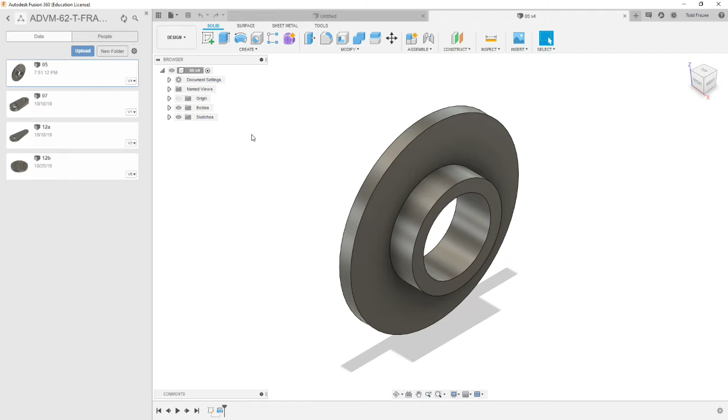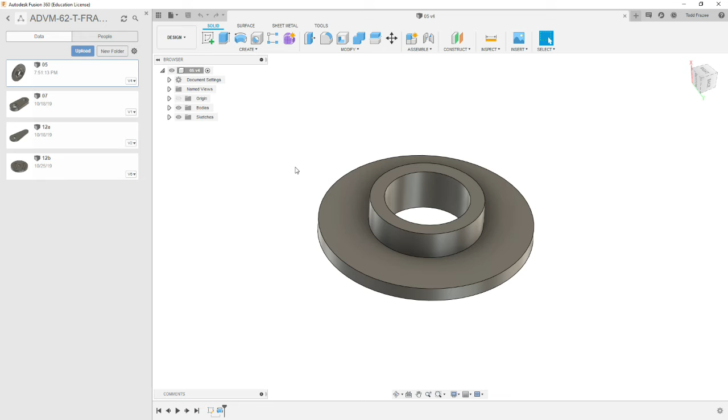Now the command I'm going to teach you how to use here to machine this part, the machining strategy, is called 2D adaptive clearing. So it'll take the entire model and process what material needs to be removed. Now in this case we're going to start off with a rectangular or square larger piece, and we don't want to waste a lot of time machining away that entire square, but we want to contain it to a circular shape that's an offset of the diameter of the part, and that way it'll rough away all the material within that circle. So to give a reference for that circle, we're going to create a sketch.

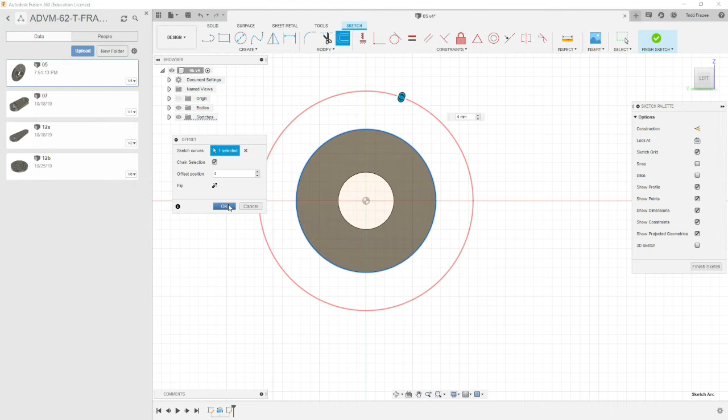Go to Sketch, select on the bottom surface of the part, and then we're going to use the Sketch Offset command, which is this one here. And we're going to select on the outside edge of the part, and we're going to offset that 4 millimeters. We're going to use a 1/8 inch end mill, which is slightly over 3 millimeters. So that should give enough room for that cutter to cut within this space. Okay, and you're going to select OK. And we'll finish sketch. You can either press finish sketch here or here.

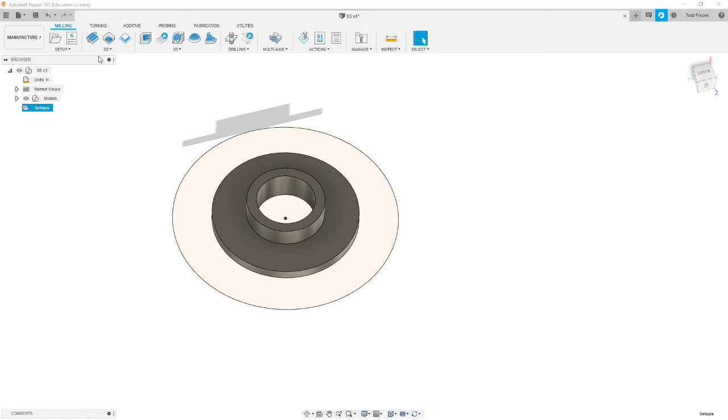Now we're ready to go into the programming side, which is in the manufacture workspace. Let's close the data panel so we have a little more menu bar space, and we're going to switch from design to manufacture. And we want to make sure that we're in inches because we're programming machines that run in inch with inch tools. Our model was drawn in metric, but it will convert them. Alright, so first, like we have done before, you're going to do your setup for the material. So we're going to press Setup, New Setup, and it's going to put a rectangular volume around the part.

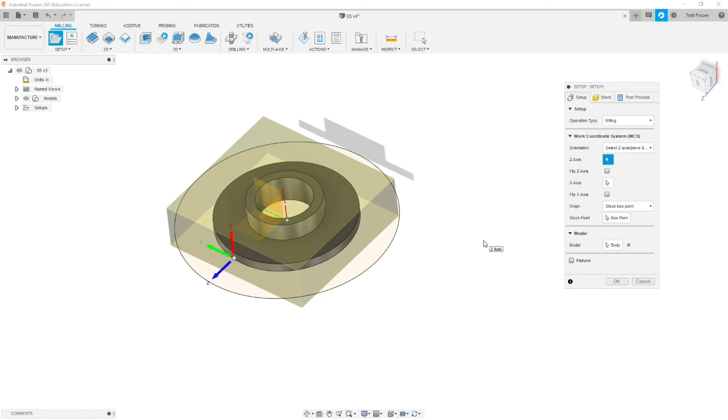And we want to change the orientation of the axis of the machine. So this was modeled so Z was going off in this direction. We don't want it on model orientation, so we're going to do Select Z-axis plane. And so we are going to select the top of the part as our Z-axis plane. Now, because this is a completely round part, it really doesn't matter which way X and Y is pointing, provided we set it up in the machine the same way that we've set up.

Now, our origin, I'm going to put it on the top left corner. It could be fine being in the center, but you select stock box point and then pick the white point on the left corner. So this puts our x-axis, from the operator, right to left, y would be away from or towards the operator, and z is pointing towards the spindle. Now let's adjust our stock size. We're going to the stock tab.

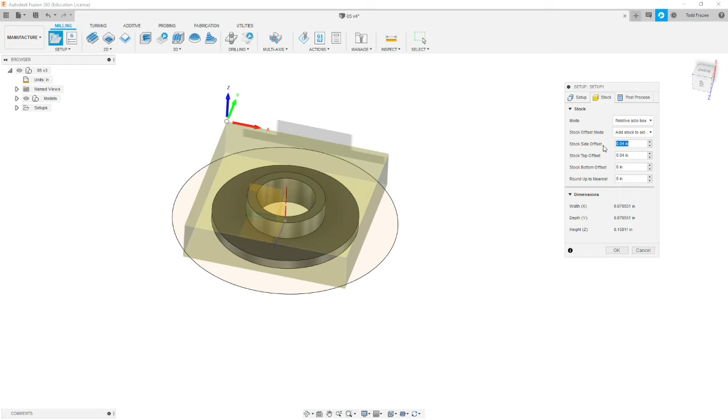Now our stock offset on the sides, we're going to bump this up to a 1/2 inch, and then we're going to go down, and our top offset is going to be 0. So we're going to start off with a piece of brass or bronze that's 3 millimeters thick. We should be able to buy that in metric, and that'll save us time not having to machine the material down to thickness. So we go back to our setup tab. Our origin should still be the top left corner, but it moved out to the edge of the material. And our stock size is approximately 1.5 inches. It's a little bit more than that.

Now let's go to our post-process tab, and we're going to put in a numbering convention that follows the number of the part. So we're going to do a number. The first 2 digits will be the dash number of the part, which is 05, and then this will be program 1. So 01.

Then we're going to put in a program comment, which will be the name of the program. It'll show up on the setup sheet. Let's call it Operation 1, and we're going to use work coordinate system offset 1.

So to review on setup, we should have top left corner, Z pointing up, X pointing horizontally along this edge. And our stock should have a 1/2 inch on the sides and 0 in all these other boxes. And our post process should be number 0501, operation 1 with work coordinate system 1. And we're done with that step, and our setup will show up over here on the left.

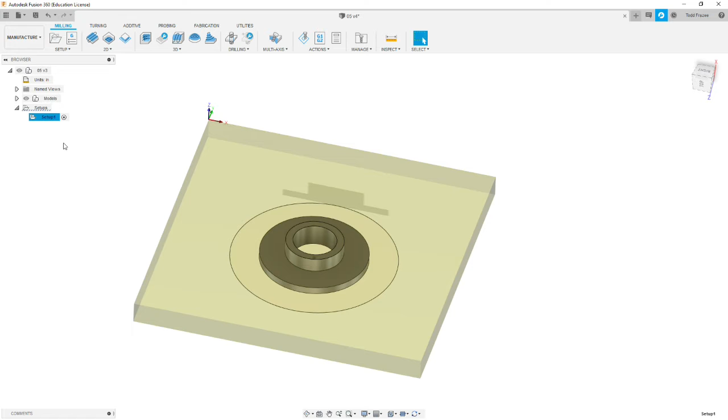Okay, so now we're going to apply the 2D adaptive tool. Now this is really effective for real complex geometries. This is a fairly simple part, but it has enough features that we can use this command on it. So select 2D adaptive clearing, and it's going to start with what tool to select. We're going to select the TCOSE library, and then we're going to select tool number 17, which is the 1/8 inch flat end mill. And select OK.

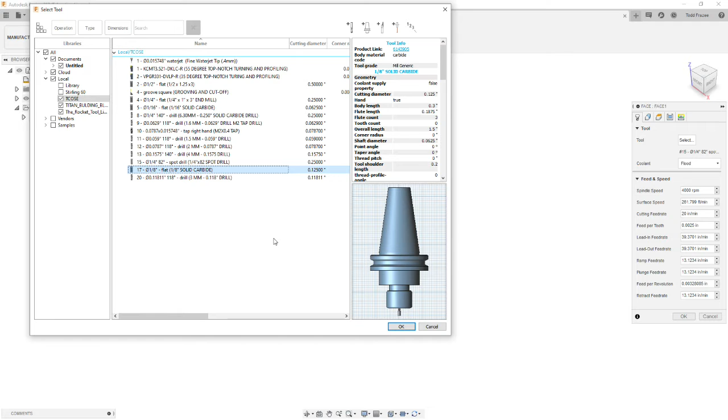And we're going to go 5,000 RPM. And our cutting feed rate, it should auto-populate already at the feeds and speeds that Kennametal recommended on the conservative side. Kennametal says you can run this much faster in feed rate, but we don't have a machine that has a high enough spindle RPM for it. So it's proportional to the feed rate. We could go up to 8,000 RPM on our machines, but for this academic class, we're going to go 5,000. Okay, so all of these should be at default. Your ramp rates and plunge rates, general rule, will be half of what your other feed rates are.

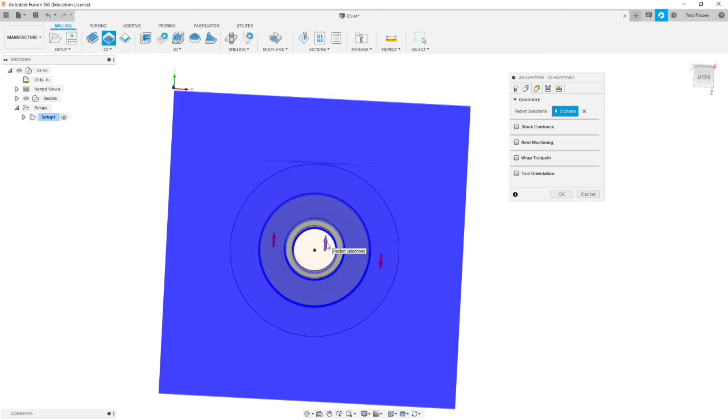Okay, we're going to go to geometry, and we're going to select the outside of the part itself. We're going to offset. We're going to select this boss flange. And then we're going to select this inside edge here. And we need to check that the arrows are on the correct side of the line. Now, this last one is not, so we're going to pick on there. You want the arrow where the material is going to be removed. Okay. All right.

Now on this one, it's different than what you've done before. We're not going to use the stock for the stock contours. We're going to select the stock contour, and we're going to select this sketch that we've made. And that'll contain the machining to within that boundary. Our lead-ins will still want to lead in from outside the material. Okay, so now let's move on to the next tab.

Heights. We'll leave these all at default. And we're going to machine to the selected contours. That's how deep we're going to go, but we're going to leave some material at the bottom. We don't want to completely remove this from the part material, so we're going to leave 0.01 on the bottom contour. And that'll leave some flash at the bottom, or, well, in some cases we'll cut through, like in the hole. But we'll probably leave a very thin layer of flash here to keep this part connected to the surrounding material while it's being machined.

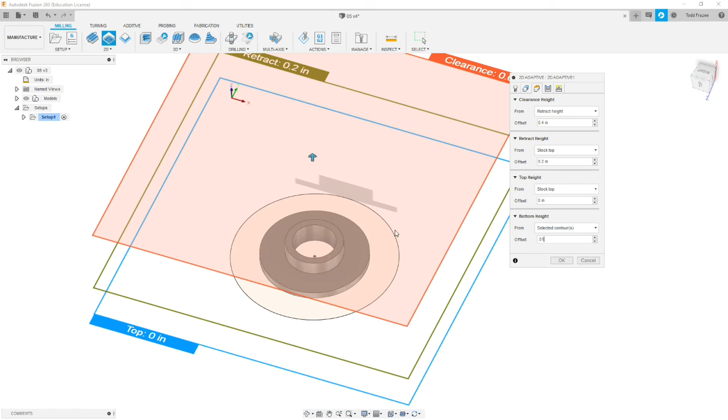Okay, we're going to go to passes. We're going to leave these all at default. We're going to let the optimal load auto calculate. We do want a climb cut. We are going to cut at multiple depths. Our maximum roughing step down is going to be 0.06. So it's roughly half the diameter of this cutter. We're going to go in order by depth.

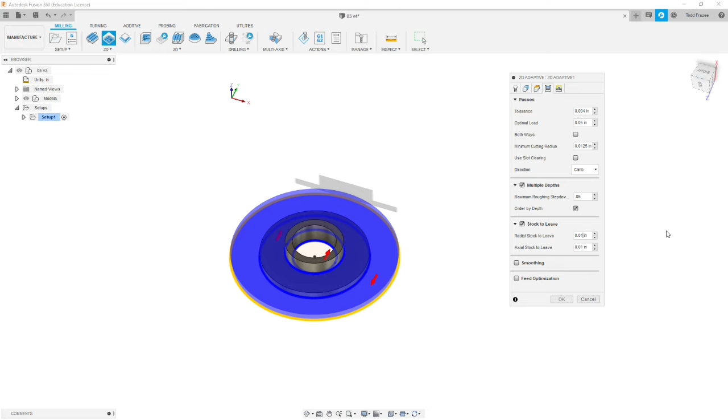And the stock to leave, we want to leave a little less than that. This is a little tiny part, so we're going to leave 10 thousandths radially and axial. So this is just purely roughing. We're going to come back and finish every surface on this part. Alright, because this is roughing, we can skip the smoothing and we're going to go to linking tab. We're going to leave all of these boxes at default.

And then our horizontal lead in and vertical lead in and out. So on horizontal lead in, we're gonna bump that up to 0.07, a little over half the diameter of the cutter. For this, we're not going to do any fancy ramping, so we're going to do a plunge straight down. And the cutter is center cutting, and this is a fairly soft material. Our ramped clearance height, we're going to set that at 0.01 is fine, and then we'll select OK.

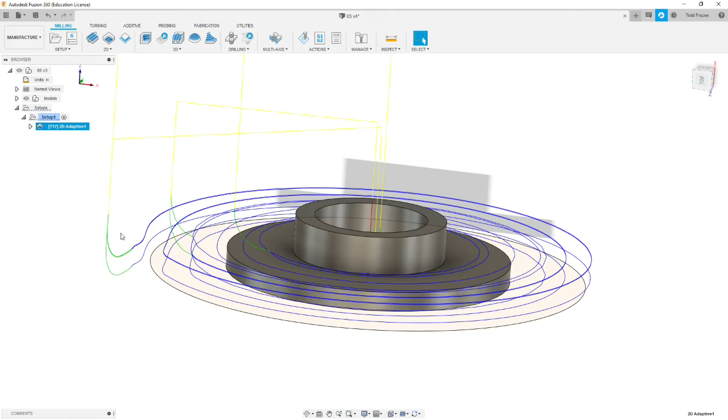So as you see, we have a vertical lead in and a horizontal lead in, and it arcs in, and it's removing all the material, starting with this circle as the edge, and then it's going to do it in a couple steps on the outside and several steps on the inside. And if we look at the side view, we should be not cutting all the way to the bottom. So we've roughed away most of the material.

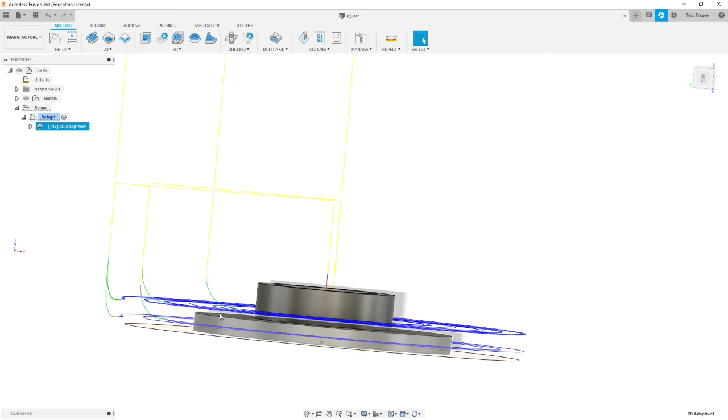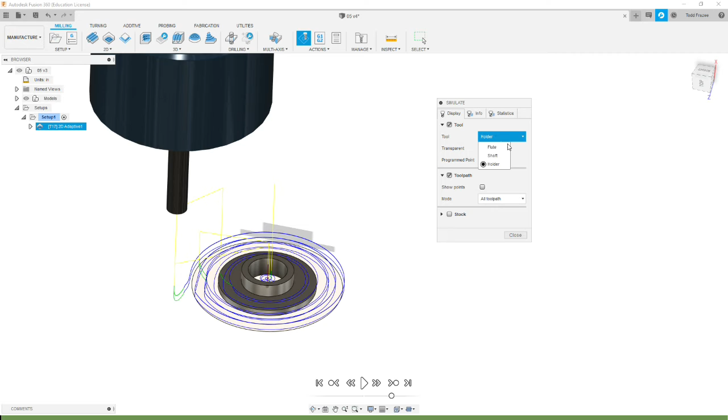Now let's simulate what we've done so far. So we highlight that operation, and then we're going to go to simulate. And for this one, I'm going to hide the holder, just because the holder is so big in relationship to the part, you won't be able to see anything. Okay, and we're going to display the stock.

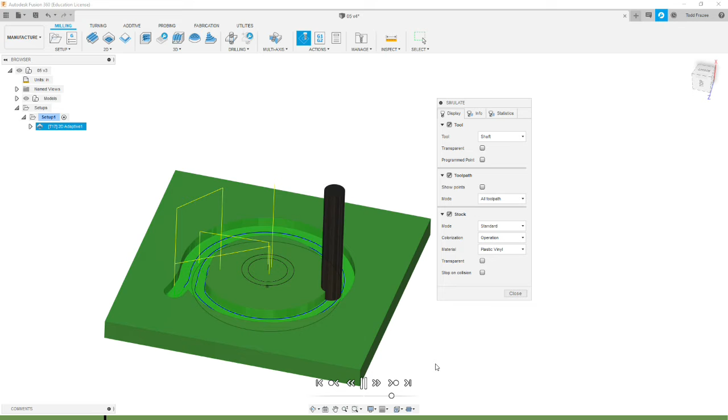So we have it coming in, arcing in. It's spiraling towards the center. It's now going to pick up, and it should plunge in the same area to do its second clearing. And now it mills out the center, and now it's going to go around the outside periphery.

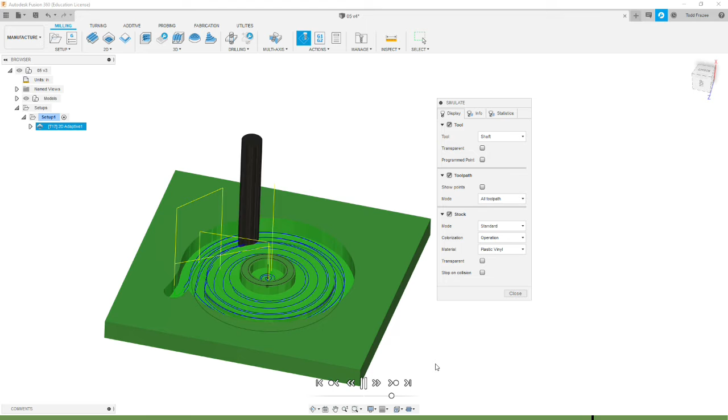Okay. The reason it went back to the center zone is we selected that box that says finish by depth. So it's finishing everything to a single depth, and then it comes back and does a center. Now you notice these facets. These facets are going to show up in the part, but it's roughing. And the machine will run a little faster, but it's broken the arcs into line segments.

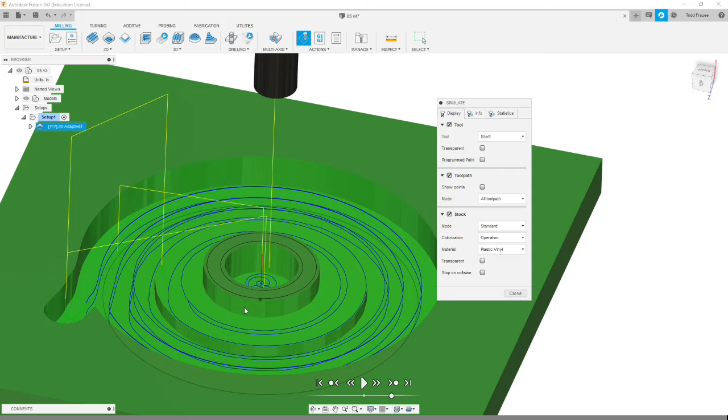Had we selected that smoothing option, this would have cut a more smooth circle. It's going to be critical that we have the smoothing option selected when we do our finish cutting. Okay, so we've cleared all the material out of the way. Let's hit OK. All right.

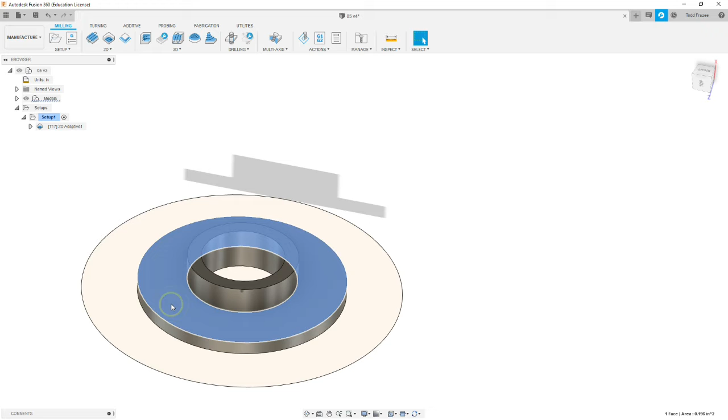So to do our finishing, we need to finish this surface. We need to finish the inside diameter, and we need to finish this outside diameter. They all have 10/1000ths of extra material on them. First, we'll clean up this face here. So we're going to go and use a 2D contour command.

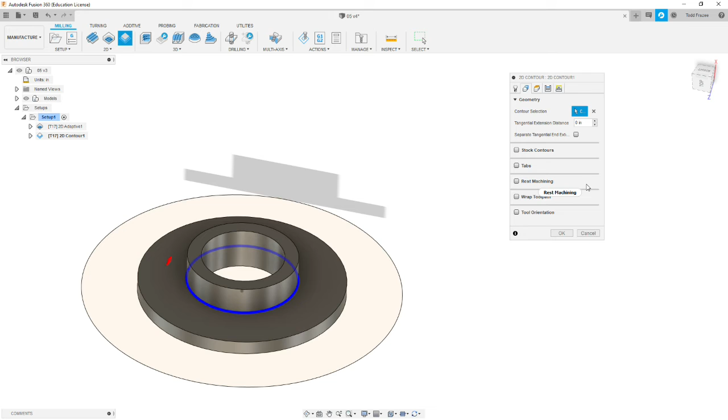We're going to continue to use that 1/8 inch end mill. And we're going to cut up to this boss feature here. So we're going to select the bottom of the boss. Make sure the arrow is on the correct side of the boss. And now we are going to leave everything on the first tab as is. Same RPMs and feeds and speeds. Our geometry, all we need is that circle.

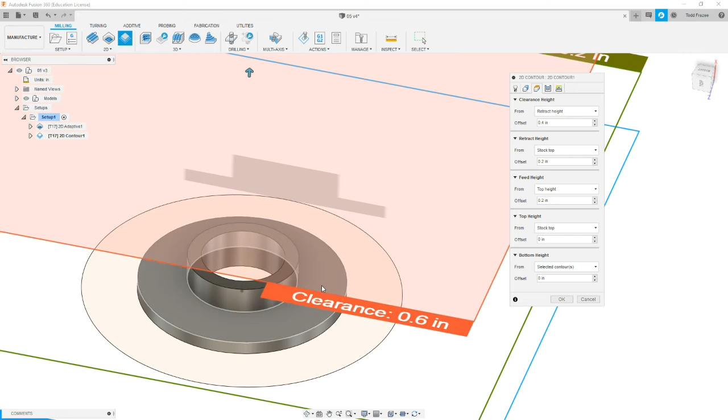We're going to move on to heights. We'll leave all of these at default because we're going to cut down to our selected contour. Okay. On the passes tab, we're gonna come down these. We have tolerance, we'll leave alone. Sideways compensation, yes, we want to climb mill to the left.

We do want to select this cutter compensation type wear. That allows the code to be output so the person operating can adjust the diameter of the tool based off the wear of the diameter of the tool. Okay, so we're going to keep continuing down. Our finish feed rate, we're going to go the same speed as our roughing rate. And finishing overlap, we're not going to worry about that. And lead end distance, we want it to do a full lead in, so we don't want to change that.

We're going to skip down to rough passes. These are horizontally. Now this flange is wider than an 1/8 inch. So we want to go around multiple times so that we're cleaning up the bottom of the part, the entire face. So we're going to do a maximum step over of 80% the diameter of the cutter. So let's get our calculator out.

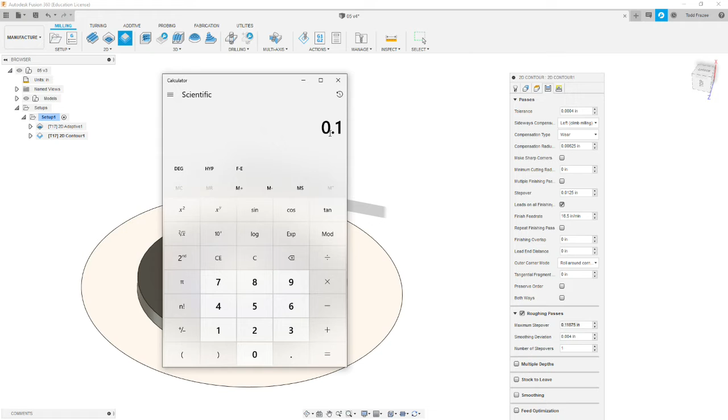And we're going to take 0.125, which is the diameter of the cutter, and multiply that by 0.8, 80%, which gives us a value of 0.1. Okay, so we're going to put 0.1. 0.1 is a good number. 80%, if you're doing pocketing, it'll assure that you have full cleanup every time it changes directions.

Our smoothing deviation, we're going to leave it 4/1000ths for the roughing cut, but the number of step overs we're going to do, we're going to do 2. So as soon as we check this box, a box appears up here, and it's our finishing step overs. It's a little confusing why they designed it this way, I don't know, but we do want to do a finishing step over of

0.005. Okay, and so what it's going to do is it's going to go around and rough and leave 5/1000ths for a final pass on this side step over. But that box doesn't appear until you check this box here, so you have to kind of go back and forth. Okay, we're going to go to linking tab, and on the linking tab we'll leave all this at default. We're going to do a horizontal lead in.

I think we need to mimic what we did before, so we did a 70/1000ths lead in, and our sweep angle, we'll leave it at 90, and we're going to do 0.07 or 70/1000ths, and our vertical lead in, we're going to set it 0. We're going to leave these 2 boxes checked. If they're not already checked, you need to check them.

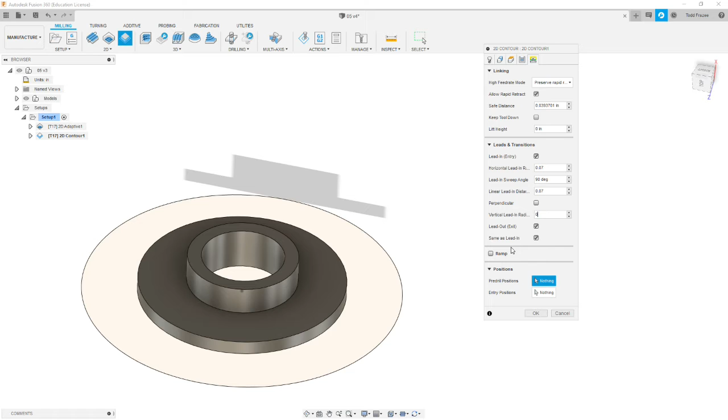This lead out, we're going to do a lead out, and it's going to be the same length as a lead in. We're not going to do a ramp, and that's done with our parameters. We'll select OK. So we have our one plunge, our first plunge, and it does one roughing pass. It does kind of a curved cut, comes in and does another rough cut, and then it picks up and does another arc in and arc out for the finish cut.

Our next operation is to do another 2D contour. So here I'm going to show you something kind of neat. We like the parameters we have here for the most part. So we're going to right click on this routine, and we're going to do a copy, and we're going to do a paste. So now we have a copy of that same toolpath. Now let's go in and edit that toolpath. We're going to use all the RPMs that are the same.

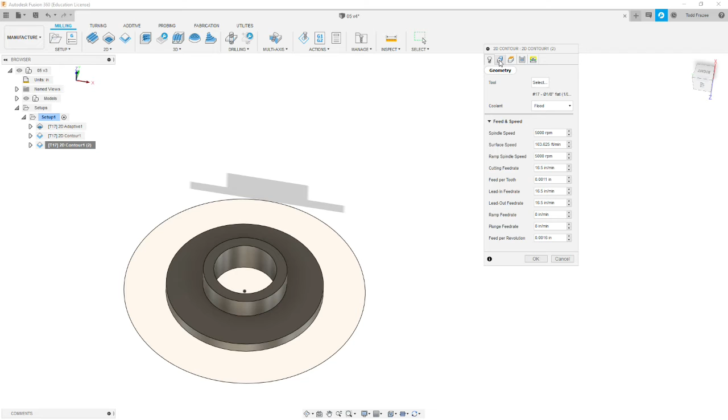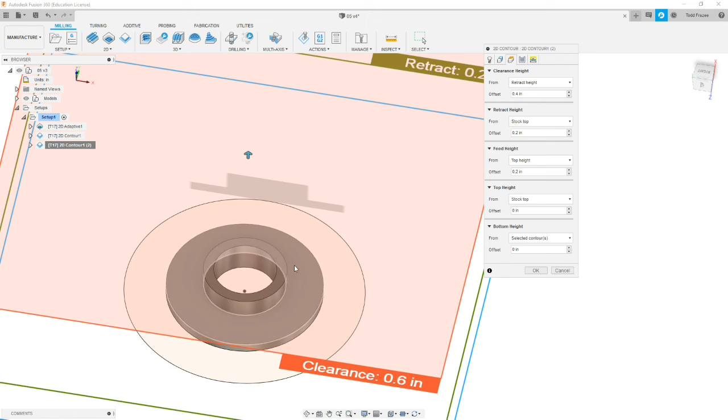Those worked before. Our geometry is going to be different, so you're going to clear that out. And we're going to select the center bore of this part. And we need to pick on the arrow to put it on the correct side of the line. Okay, then we can go to the next tab, which is our heights, and we're going to leave all these at default. For this center bore, we're going to go ahead and cut all the way down to the bottom. And we should be able to leave all of these at default, except for we're going to just do 1.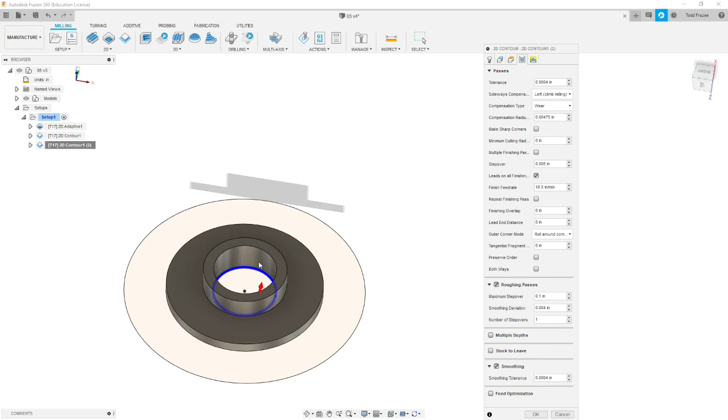And we're doing that so that the cutter will come in and rough away, and then when it cuts the final cut, it won't be under load. And we'll cut a nice finish. In our maximum step over, we're going to reduce it to 0.03 because there's not very much room in this feature for the cutter to move around in. Then we're going to select multiple depths.

And our multiple depths, we want to mirror what we've been doing before. So we did 0.03 for our maximum roughing step. And then we'll do one finishing step over at the bottom. And that step over will be 0.005. We'll just mirror what we did in this box. Approach along wall is fine. And we are going to finish only at the final depth, as we have a cutter that's long enough. And we're going to use even step downs. And we want to rough the final.

The rest of these boxes will not matter because of the type of geometry we selected. You want to make sure you have this smoothing selected, and you want 4 ten-thousandths in that box there. That's going to give us a nice curvature. Okay, we're going to go to the linking tab. We're going to leave these all at default. We're going to set our horizontal lead in at 0.01. We're going to set our lead in distance as 0.01. We're doing that because there's not a lot of room for a lead in. Okay, and our vertical lead in is going to be 0.

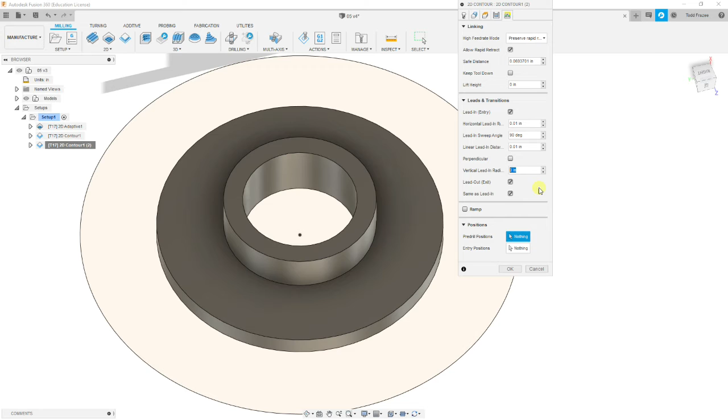And we want to make sure that these two boxes are selected, lead out, and to have a lead out and have it the same length as the lead in. We're going to hit OK. And so we get 1, 2, 3, 4, 5 roughing cuts going down, and then we step over 5 thousandths and we do a finishing cut. The green arcs are our lead ins for our roughing and our finishing passes. Okay.

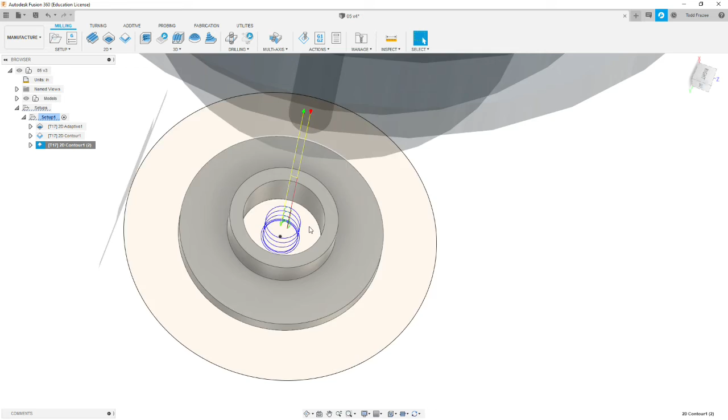Now we want to finish the exterior of the part. Now we like most of the parameters on that one. We can do the same thing. Let's highlight this last routine, and we're going to do a copy, paste.

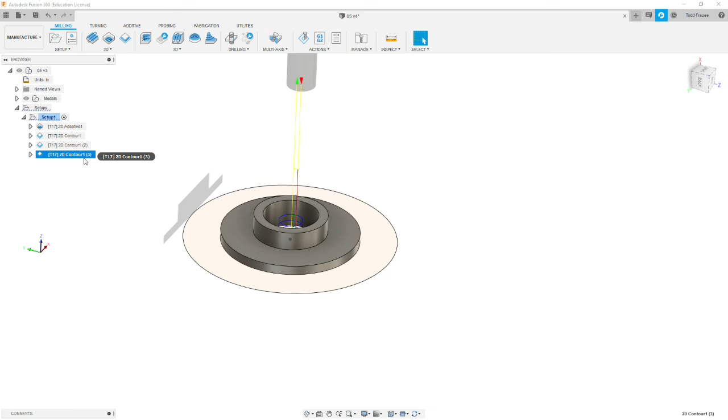Alright, so here's our contour number 3. We're going to go edit. We're going to leave all of this at default. The thing that changes is the geometry. So we clear out the geometry. Now we're selecting the exterior of the part. You want to make sure that the arrow is on the outside of that profile. And we're going to the next tab.

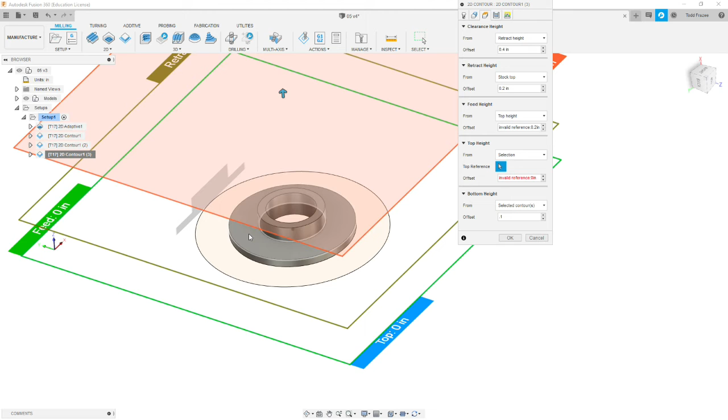So on the heights tab, we're going to leave most of this at default, except for our top height. Our top height is going to be selected. So we're going to pick selection. And the top of our cut is going to be the top of this flange area. We've already roughed away all the material, so all we need to do is cut between that face and the selected contour, which is the bottom. So we've now moved the start of our cut to down here.

And then we're going to go to selected contour as our depth, which is outside radius, but we're going to leave 10 thousandths at the bottom. And what that will do is leave a little bit of flash to hold the part to the surrounding material, and we'll cut that material off to remove the part from the stock.

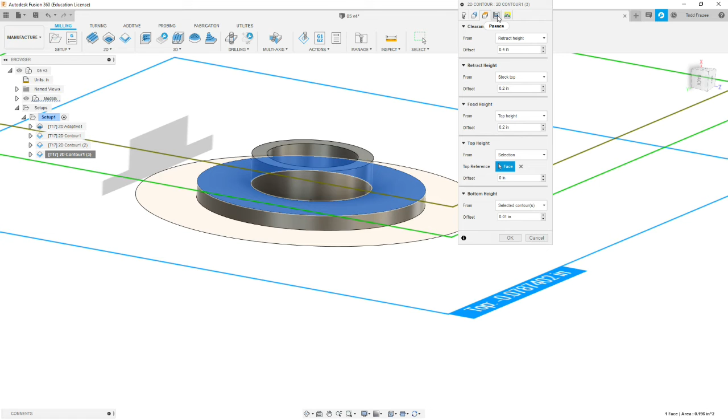Now we'll move on to the passes tab. We're going to go to our passes. Pretty much all of this is going to stay at default. And our roughing passes on the sides, we're just going to have 1. We can bump our roughing pass back up to 60 thousandths because we have plenty of room on the outside of the part. We're going to do 1 roughing pass.

And on our multiple depths, we're going to do a maximum roughing of 0.03 with 1 finishing pass at the bottom, and that'll be at 5 thousandths. Okay. All of our other parameters, we're going to pretty much just stay the same. Smoothing there.

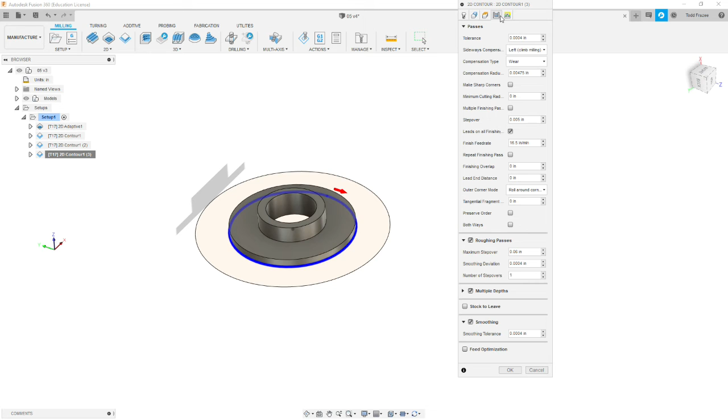Now we're going to go on to the linking tab. We're going to leave everything on the top as default, and we're going to leave a lead in. We're going to do a horizontal lead in of radius, we can go ahead and bump this back up to something larger because we're on the exterior of the part, and our linear lead-in distance as well. We don't want a vertical lead-in on this type of cut, and these should be all at default. We select OK.

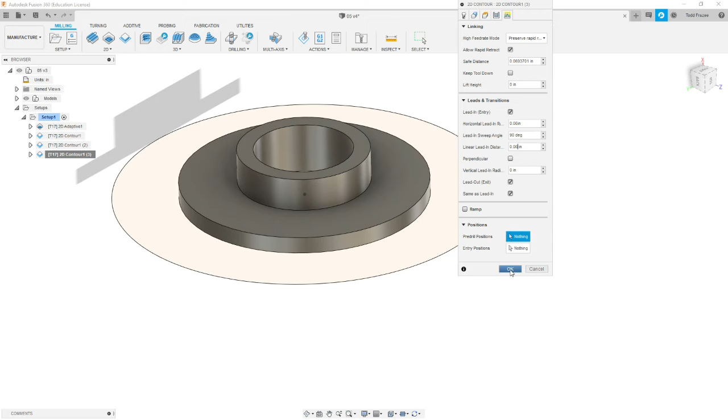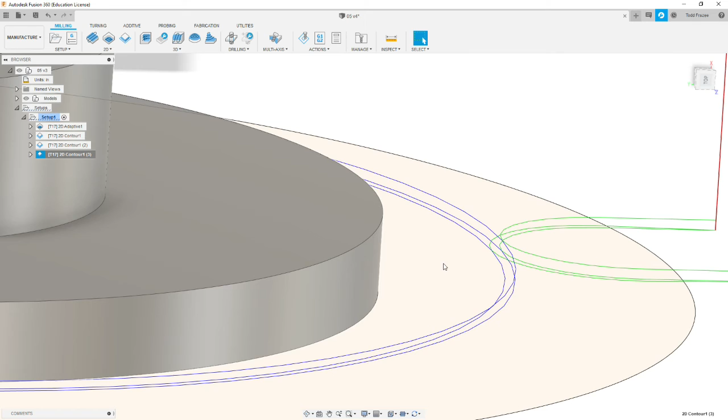Okay, so we have our plunge out here off the material, and then we have a horizontal lead-in going into a radius, and we have a couple roughing passes. We're leaving 10 thousandths on the bottom, a very small amount of material. Okay, we're done.

Now, we have several of these contours. When you have several of the same type of feature after another with the same tool, I like to go in and change the name so it's a little more descriptive. This name, whatever is here, will show up in the code and on the setup sheets. So instead of having this, we'll leave the 2D adaptive because that's roughing. But what is this actually cutting? So we're going to call this a 2D contour of boss.

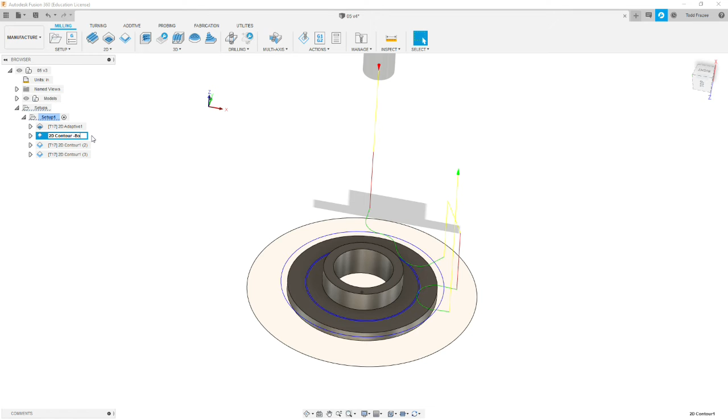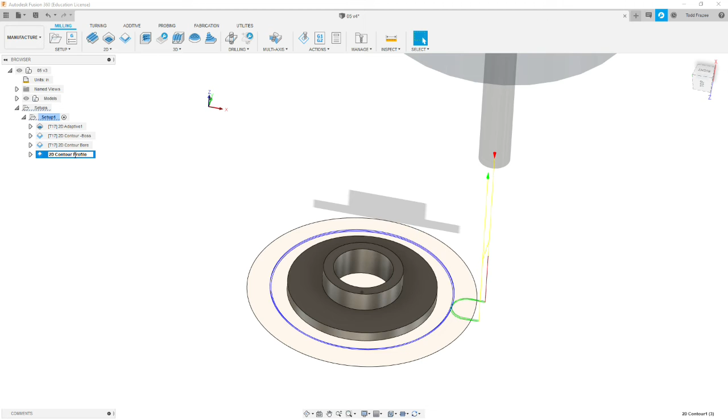And we'll change the name of this, the 2D contour of bore. And we'll change the name of this last one to 2D contour profile. How about OD, outside diameter profile? Now we know what these are actually machining, and if you have to reorder things, it gives you a better idea of what to look for.

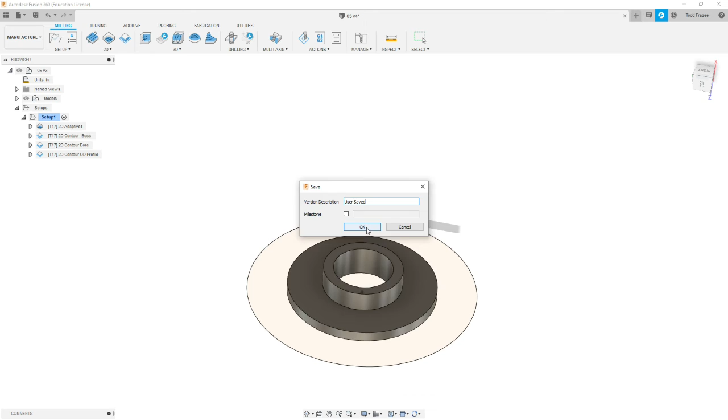Alright, we need to save. We're going to save and hit OK. And again, this overlays on your model file. You're just in a different workspace. We're using the same model file name. And now we will first simulate to see what we've done.

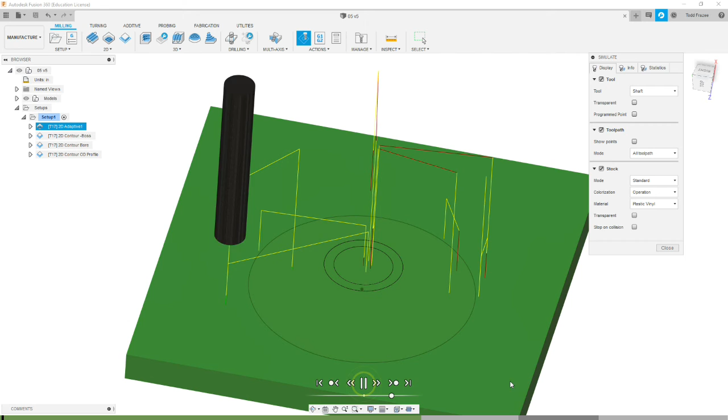Drag this off to the side. And we're watching for mistakes where we might be plunging into material where material is too much. So let's hit OK here. We got our stock sim shown, and we're going to hit play. So we come in. It's roughing around the shape.

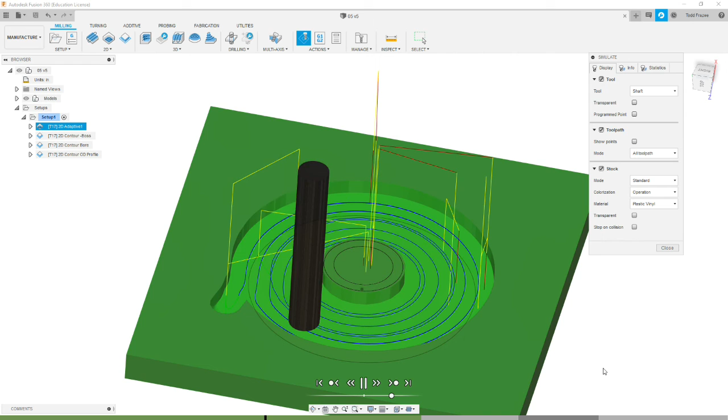Now it's going to go over and it's going to rough another level. Okay, and now it's going to come down and cut the center to the same level, and now it's going around the outside perimeter. Again, this is leaving material for the next routine to take off. And it's going to go back to that center bore and do that final depth.

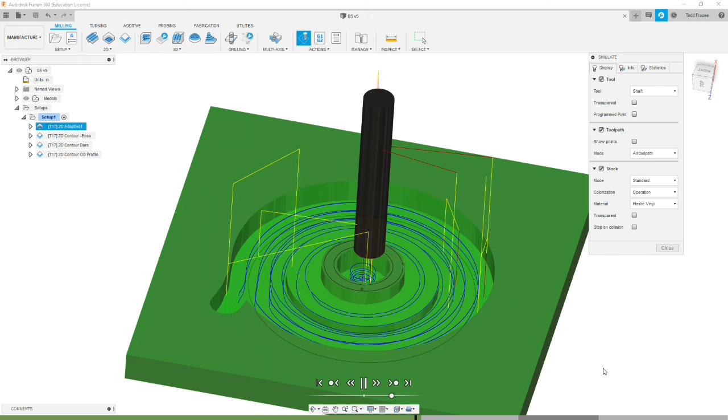Now it's coming over and it's doing the 2D contour to finish the boss. And it's cut right down to the geometry. You notice those cuts are smoother. And now it's doing the roughing cut on the inside of the bore.

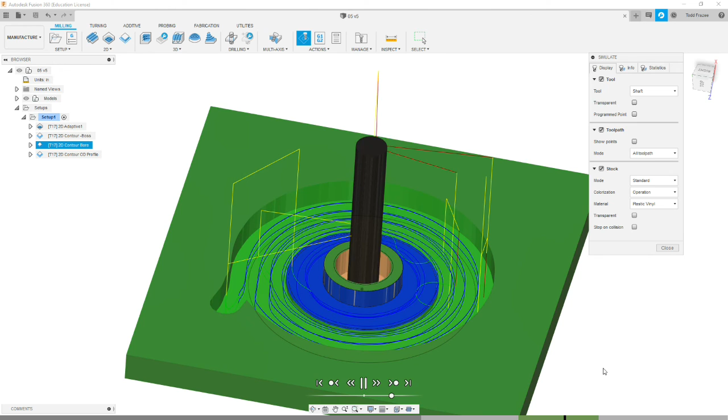Cut all the way through the part and done a finish cut. Now it's coming out to the outside. Now I'm going to point out something. We just gouged here and here, and that's because our lead-in radius is starting our cut farther out than what we've roughed. We probably don't want to do that. That could break an end mill.

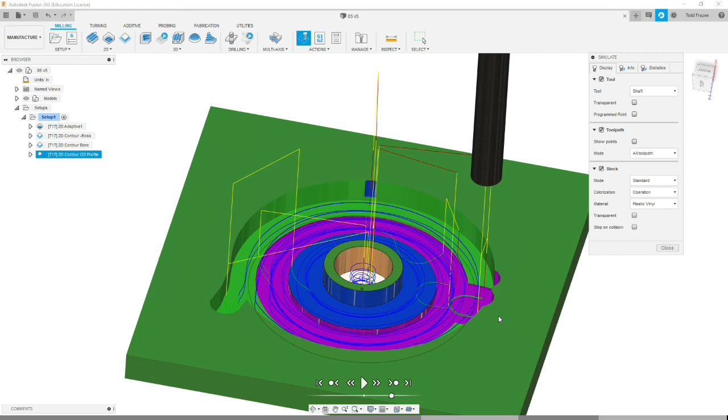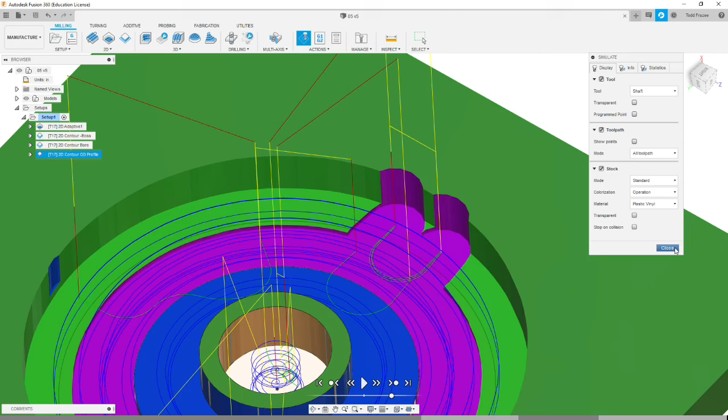So what we're going to do is go in and adjust our code or programming to eliminate these two divots here, shown in purple on the sidewalls. So the parameter we're going to adjust will most likely be this linear lead-in, and we can adjust this radial lead-in by making them both smaller. So that's what we've learned in our simulation. So let's go back and fix that.

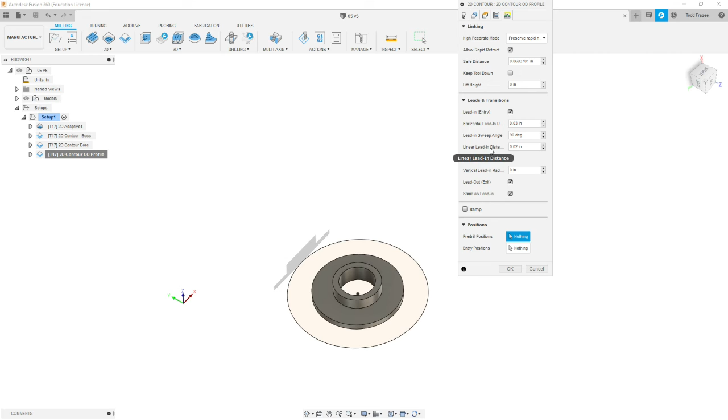That routine was our contour for the outside diameter. So we're going to go to Edit, right click, Edit, and that parameter should be on the last tab, which is the linking tab. So our horizontal lead-in, we bumped it up to 60 thousandths. That was a mistake. Let's set that at 30, and let's put the linear lead-in at 20 thousandths. Now we'll go back and simulate it and see if that does the trick.

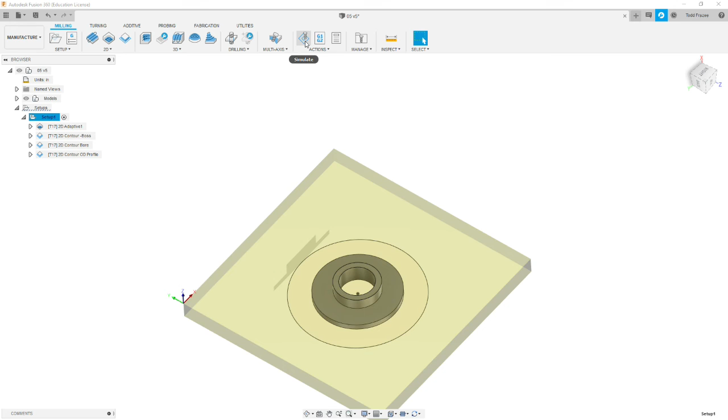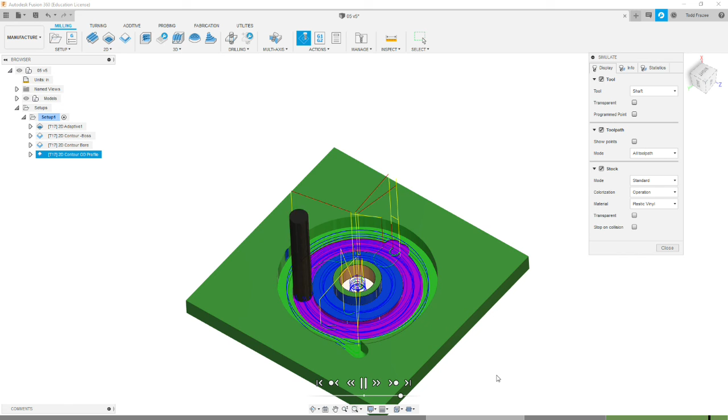Now what I think the key is that the center line didn't pass the black line that we drew for the stock. Alright, so let's go back to simulate. Pick on simulate. I'm going to bump the speed of the simulation up a little bit. There we go, that looks better. So now our plunge, when it's coming straight down, isn't hitting this mass of material here. It's within what we've roughed.

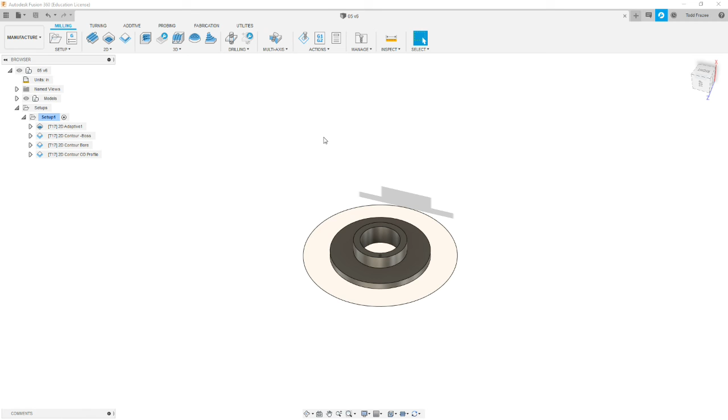Okay, so we've simulated it, we've looked for problems, we found one and we fixed it. Now let's make sure we save again. Now the next step is to run a setup sheet. Now we're going to run a setup sheet before we post-process because we're going to look for some red flags. So press setup sheet, tell it where you want to save it, and your setup sheet should look something like this.

Now something to think about when you're making the setup sheets is have your part zoomed in and have the setup here selected so that you can see where the stock is and the origin for the setup operator. I hadn't done that on this setup sheet, so that's a bit of a mistake. Let's do it again, and let's zoom in a little more so that the graphic's going to be bigger. Select the folder it's going to go into. Okay, and so that shows your origin, shows the stock material for the operator.

Alright, so what we're going to look for is red flags. Now we thought we programmed everything at 5,000 RPM, so let's make sure that our maximum RPM is 5,000. That looks correct. Now we're going to look at our feed rate. Are we going over 17 inches a minute? No. The maximum feed rate in the entire program is 16.5. Okay, so those are good flags to look for.

Now minimum Z, our minimum Z is the thickness of our material, so that looks good. Our maximum Z is set at 0.6 above the part. That looks good. And if we scroll down, now we can look at the setup sheet and it'll say, okay, we're doing a 2D adaptive, we got our contour of the boss, we have our contour of the bore, and we have our 2D OD profile. So try to keep your names about that length or shorter. That way they show up on the setup sheet as well.

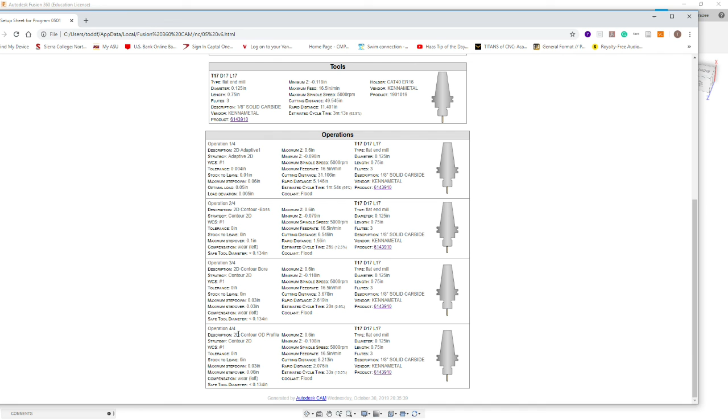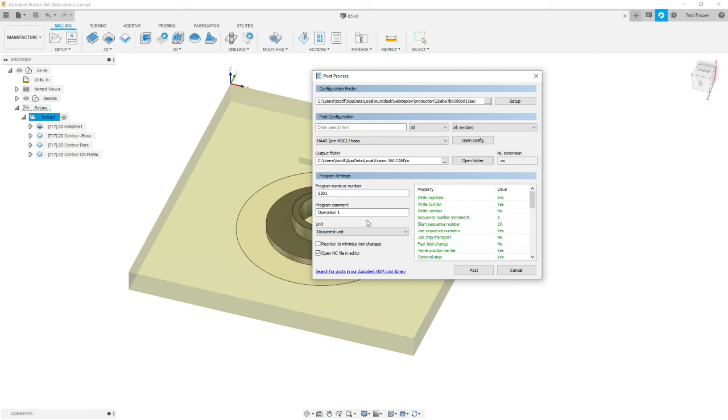Okay, we're done with that. And now we're ready to post-process. You select the machine that you're going to send it to, which ours is going to be a Haas. Your program number should populate, just like in the setup. And your program comment is operation 1. We're going to hit post-process.

And you need to save it to a destination on your drive. The post-process file will be .nc. It's really a text file, so if you change the extension to txt, you could open it in any text editor. You're going to hit save and OK. And here's the code. We're only using one tool, so it only lists the one tool, tool 17, with a diameter of 0.125. We got our 2D adaptive 1.

We keep scrolling down. We should see, even though it's the same cutter, we should see a note eventually. See a note where it starts contouring the boss. And here's where it does the contour of the bore. And here's where it cuts the OD profile and end program. Okay. A lot of code that Fusion saved you from having to do by hand.

So follow your instructions for the assignment on what to turn in. It'll be noted in Canvas.